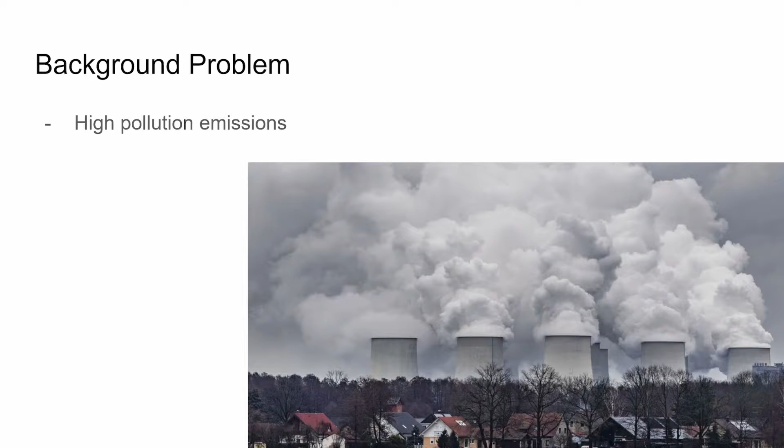10 years ago in 2011, I visited Xi'an for a week, and the weather was overcast, not because of natural clouds, but because of pollution and smog clouds. This is an issue in many of the Chinese cities and also other developing areas of the world, such as cities in India.

So, what is smog? Smog is a combination of carbon dioxide, sulfur dioxide, carbon monoxide, and particulate matter, as well as NOx and heavy metals. The most damaging pollutants are the PM2.5 and PM10 pollutants. So, basically, with the whole COVID situation, anything that reduces your immune system will likely make your whole COVID experience worse if you get COVID. COVID is most likely not going to go away, and at best will turn into an endemic, kind of like the flu.

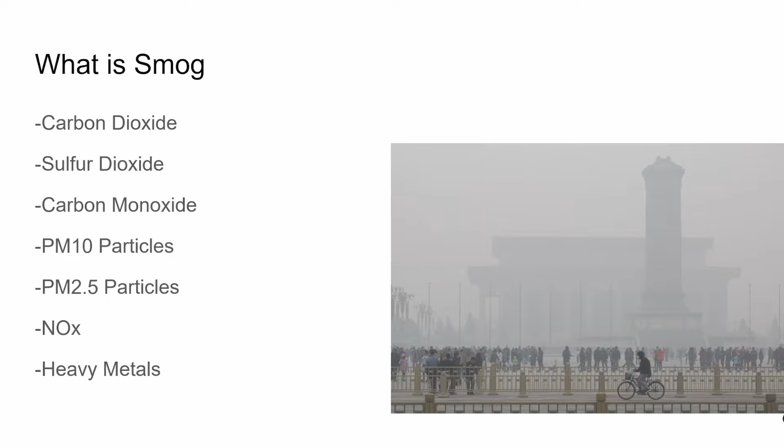So if smog pollution is so bad, what can we do about it? Transitioning to zero emissions of pollutants globally today is not feasible due to technological limitations and economic factors. That being said, there are efforts to reduce the emissions of pollutants in many countries around the globe, and this will take many years to do.

So why is smog an issue? There are many health impacts with smog, which include an individual's nervous system, respiratory system, cardiovascular system, and immune system. Common symptoms of pollution exposure include headaches, breathing issues, heart issues, and allergy issues. It has been shown that severe long-term exposure to pollutants decreases life expectancy and reduces quality of life. And the most damaging are the PM2.5 and PM10 pollutants.

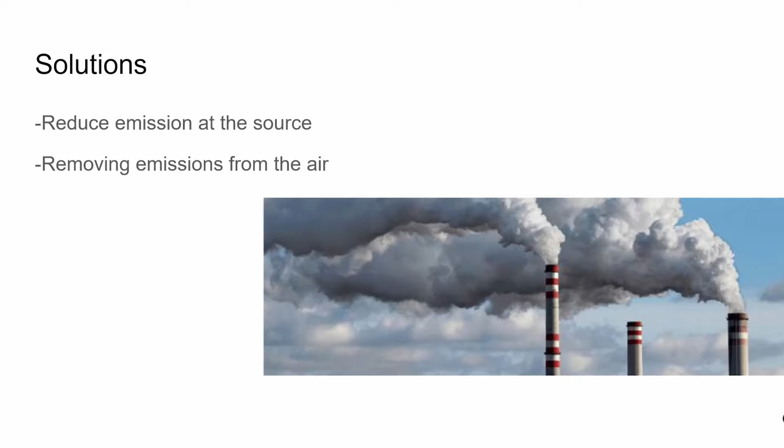So potential solutions would be to reduce emissions at their source or remove them from the air. The first one would be the most effective, and the second one we will be addressing here. The factors that influence the exposure are the magnitude, duration, and frequency of the exposure. The magnitude is basically how much bad stuff is in the air. The duration is how long a person breathes in the bad stuff, and the frequency is how often they do so. So we'll be addressing all three of the above.

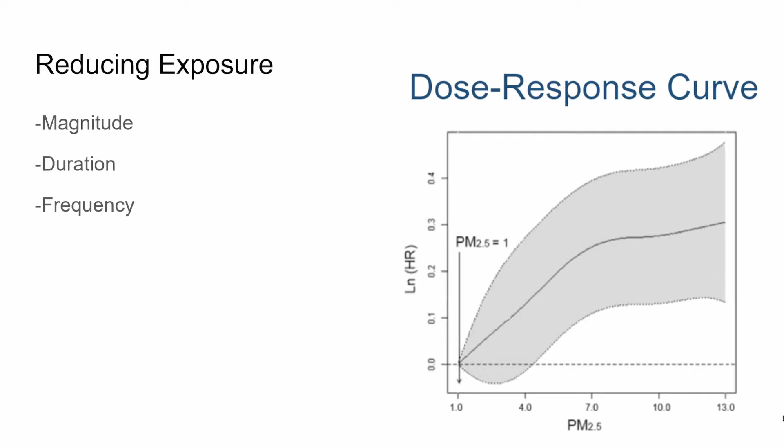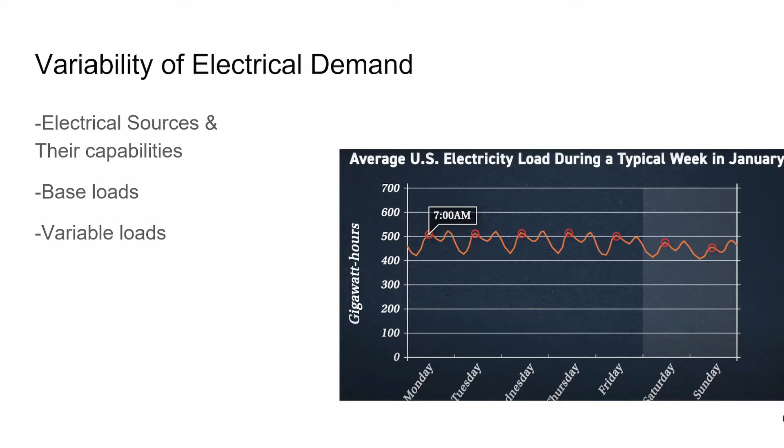The next one's going to be natural gas. Natural gas and petroleum are able to ramp up and ramp down their supply of electricity to the grid within minutes, versus coal and nuclear where it takes a large amount of time to switch. The issue with wind and solar is that you can't really predict when the wind is going to blow or if there's going to be clouds long term, so it's an unpredictable source of electricity. And then there's other portions to meet the load of the power grid.

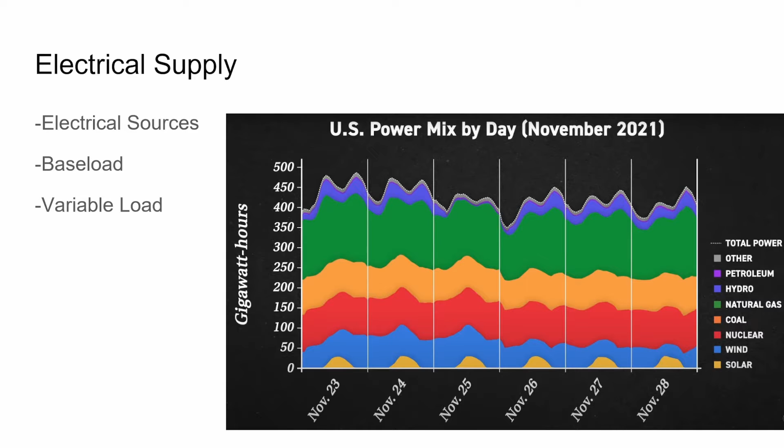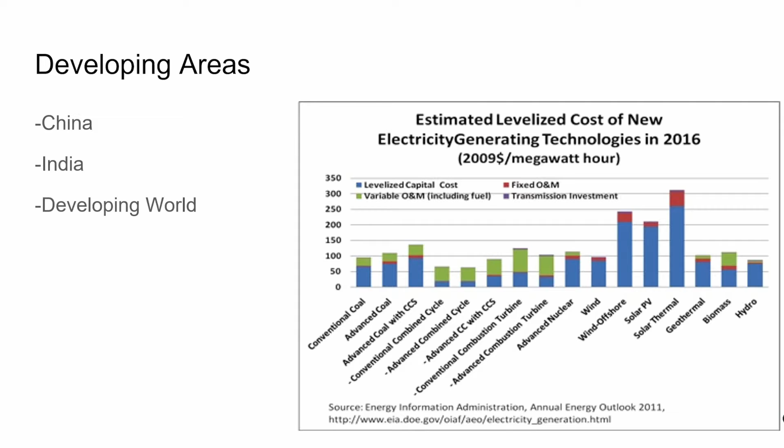Developing areas include China, India, and other countries in the developing world. We see the cost of coal on the left, which includes their building cost and the cost of fuel. In the middle, you can see the cost of nuclear. A proposed solution would be to use nuclear as the base load as opposed to coal, which would reduce the emissions of greenhouse gases and particulate matter as well. The waste from nuclear reactors is relatively minor. There is the issue with long-term nuclear waste, but that'll be addressed in another slide.

So potential problems with nuclear is that some countries can attempt to use nuclear material as weapons grade uranium. So the solution would be to incorporate a fourth generation nuclear reactor instead of coal. The fourth generation nuclear reactor produces much less waste than the conventional old style nuclear reactors that were known, such as Chernobyl and Three Mile Island.

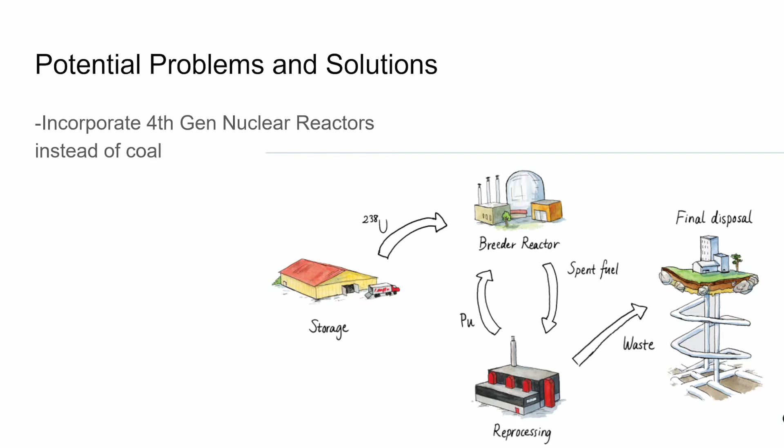The risk of meltdowns for the fourth generation nuclear reactors is much lower. Also, the nuclear material is mixed in with other materials to make it very non-economical to enrich those products. In addition, the waste produced, instead of lasting 20,000 years, only lasts a few hundred years, which is a lot more manageable than the current legacy systems.

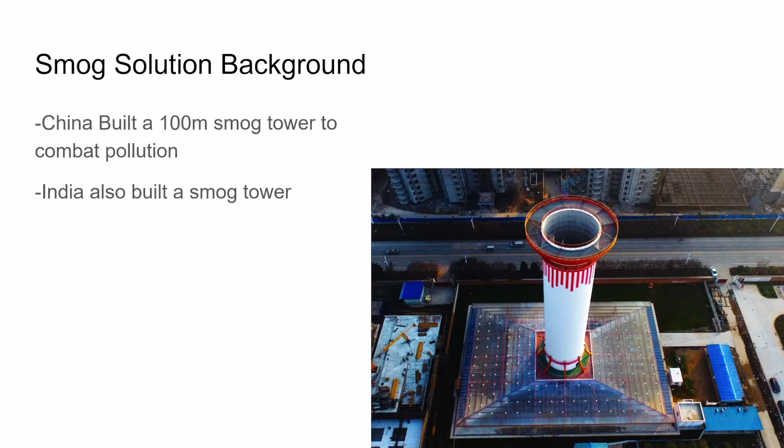So some background on smog. China has built a 100-meter tower, a smog tower, as well as India. The Chinese smog tower works by first pulling in air through the bottom. They have a small greenhouse at the bottom of the tower, which heats the air up, which encourages the convection flow and for it to rise. The second step is that it'll rise through the tower, and the third step is when it's in the tower, it'll be filtered through HEPA filters as well as ionizing radiation.

So basically, this is just a giant air filter, and it's effective in removing PM 2.5 particles. The process works by sending direct current through the air to produce positive ions in the air, which is a better solution than alternating current, which produces different types of ions. So this system, the DC system, does not produce ozone.

The ionized air attracts undesirable particles such as carbon monoxide and NOx. That air then gets bulkier and attracts the bad stuff, increasing the size and weight of the particle, and then these particles are easier to filter. This technology is theoretically possible, and there are still ongoing studies on the technology and its effectiveness.

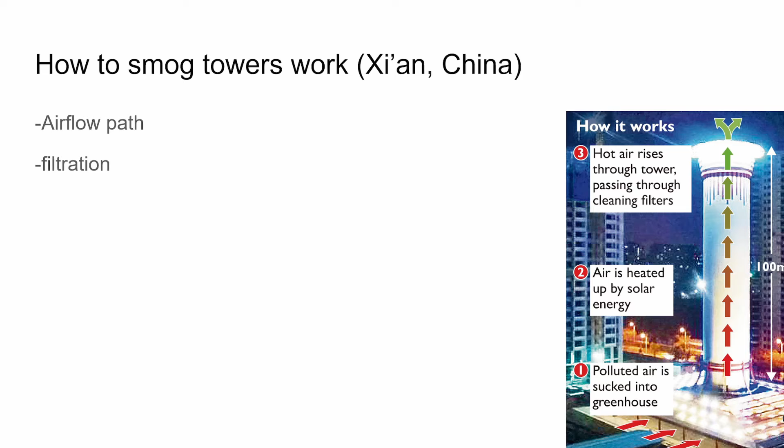Another European scholar and their studio, Roosegaarde, designed a 7-meter tower. The tower filters roughly 30,000 cubic meters an hour, and it's able to filter 70% of PM10 particles and 50% of PM 2.5 particles at the 7-meter tall scale. The effectiveness of these towers is still being studied.

The filtration technology would be most effective if used as a building's intake filter system. The best way to utilize this technology would be to incorporate it in high-density, high-rise structures and buildings where people work and live. People usually spend most of their time either at home or at work, so this would address the duration portion of the exposure.

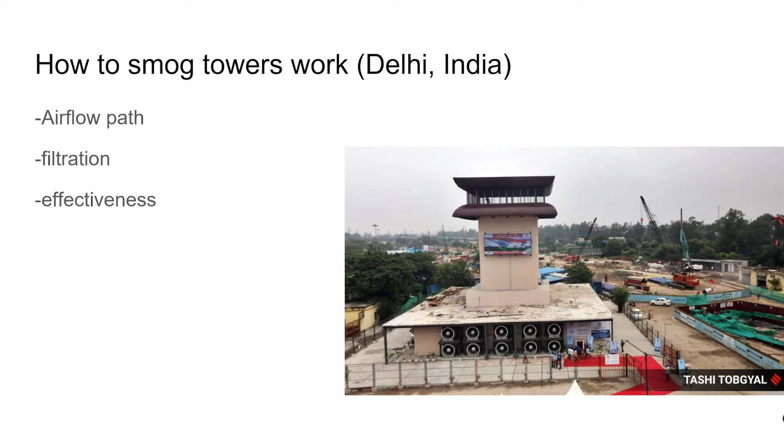So essentially, the modified design would be to place a modified tower on top of these buildings, but instead of having a tall smokestack, it would just be the greenhouse on top, and that'll be the air intake into the building to flow down to the outlet of the filter. Going down, the first portion would be to pre-filter the air with MERV 14 plus filters to take out the PM10 particles, then to expose the pollution to non-ozone direct current ionization, and then a cloth carbon fiber filter to filter out gases and odors.

It's not really to do this effectively, it's just to be a pre-filter for the MERV 18 plus filter that'll filter out the PM 2.5 particles. The most expensive filter of the design is going to be the last one, the MERV 18 filter.

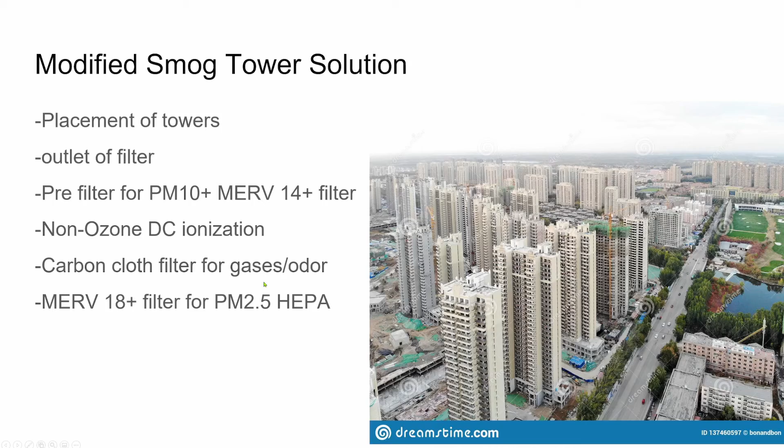So these are the design calculations. I designed it so it'll be a 15-story building with an area of 80 by 80 meters, so 6,400 square meters. Each floor is going to be roughly 3 meters in height, and the floor volume is going to be just under 20,000 cubic meters per floor. The building volume is going to be just under 300,000 cubic meters.

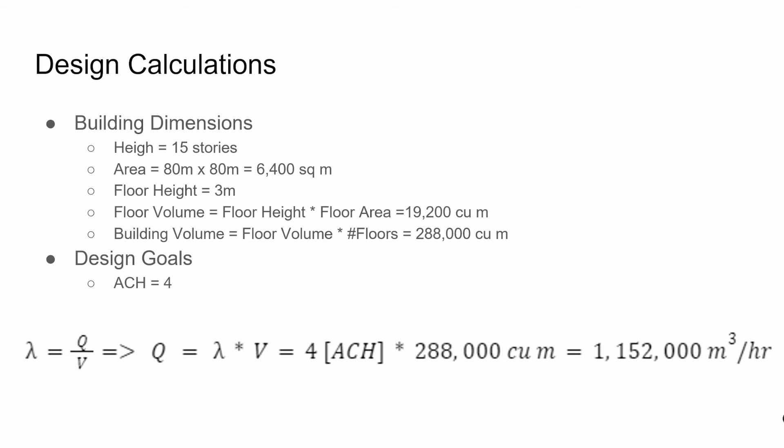The design goal is to meet 4 air changes per hour. That's to increase the airflow as well as reduce the risk of viruses such as COVID or other potential outbreaks. These are the continued design calculations, and the design is in line with claims of the 50% reduction of PM 2.5 and 70% reduction in PM10 particles. The filtration of gases is very difficult and not really a feasible option at the large scale.

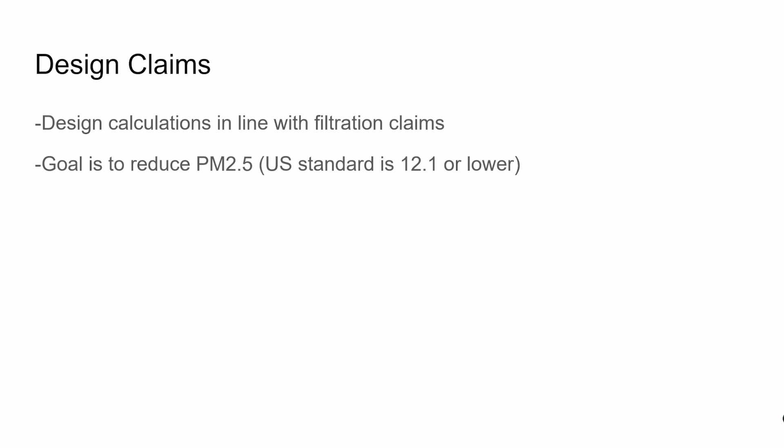That would be addressed through source control and coal plant scrubbing to reduce the sulfur dioxide. The short-term solution is to retrofit these filters on top of central air buildings, and the long-term solution is to cut polluters at their source. So it would be to shut down coal-fired power plants and replace them with nuclear power plants, increase our wind and solar technology, as well as invest more money into the storage of energy.

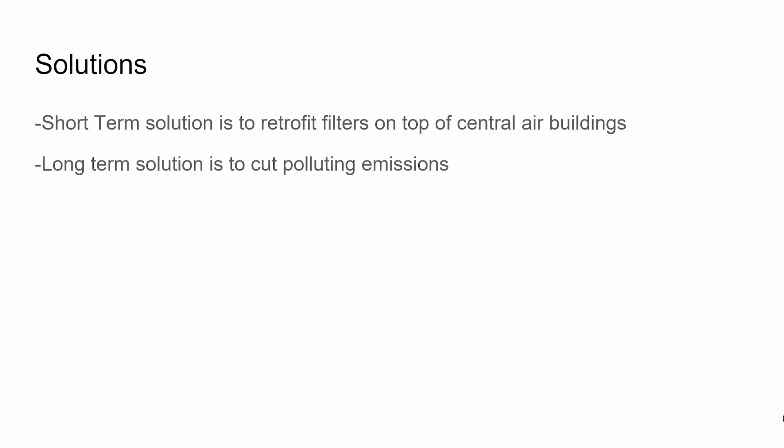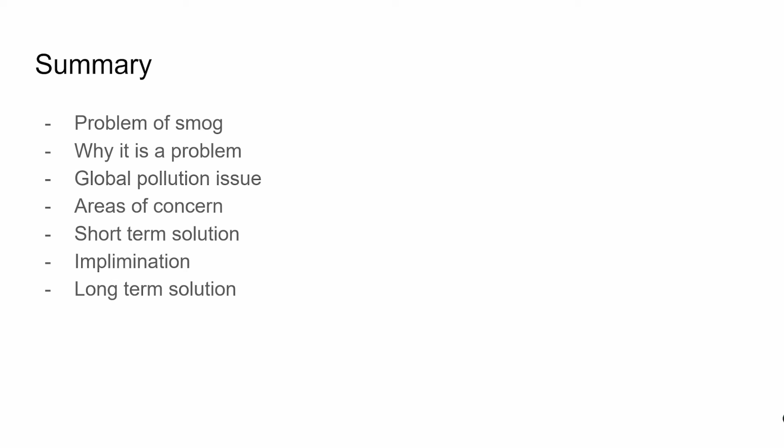So in summary, today I went over the problems of smog, why it is a problem, global pollution issues, areas of concern, short-term solutions, the implementation of the design, and long-term solutions. And here are my sources.